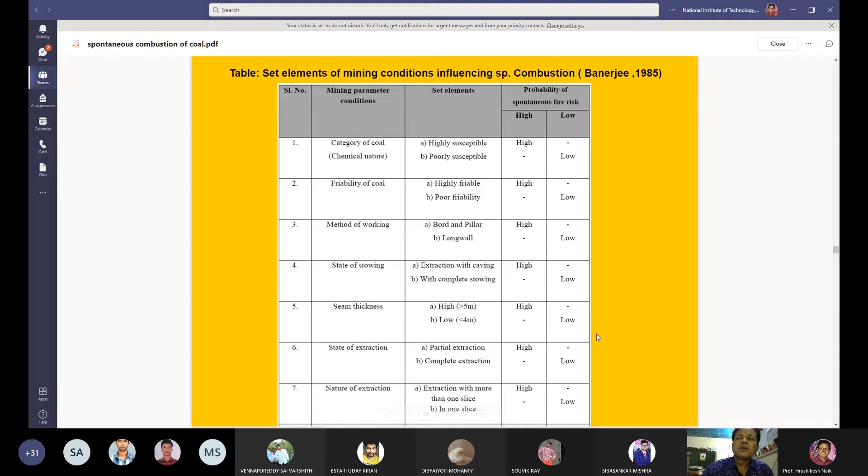State of extraction: if you are going for partial extraction, there is high risk. If you are going for complete extraction, there is low risk.

The nature of extraction: extraction with more than one slice has high risk. If you are working one slice only, there is low risk. Then geological disturbances.

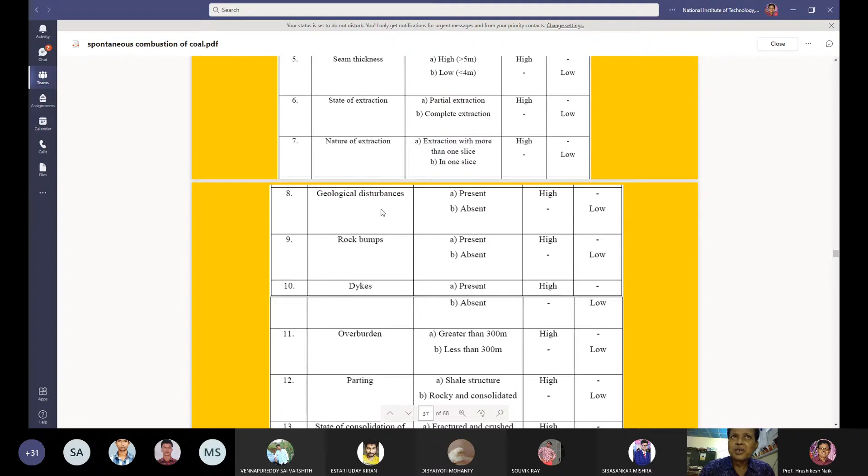If geological disturbances are present, there is high risk of fire. If geological disturbances are absent, there is low risk of fire.

Then rock bumps: if present, there is high risk of fire. If absent, there is low risk of fire.

Then geological dikes: if dikes are present, there is high risk of fire. If dikes are absent, there is low risk of fire. Then overburden.

If the overburden is greater than 300 meters, there is high risk. If the overburden is less than 300 meters, there is low risk of fire.

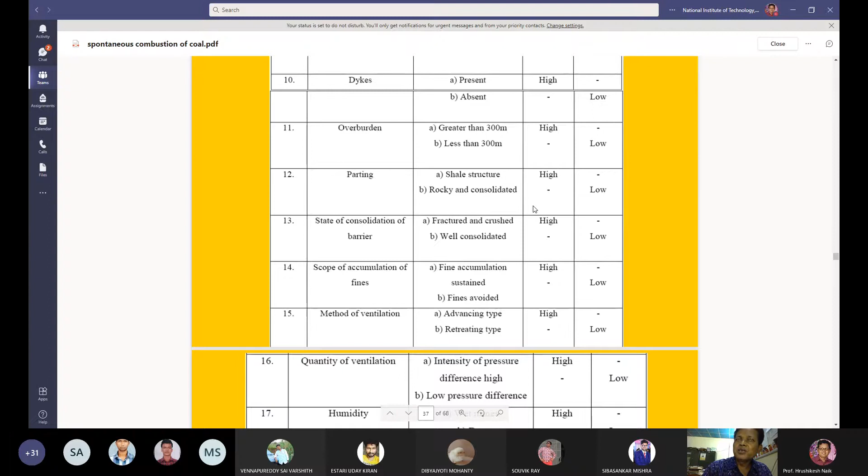Then parting: if the parting is a shale structure, there is high risk of fire. If the parting is rocky and consolidated material, there is low risk of fire.

Then state of consolidation of barrier pillar: if the barrier pillar is fractured and crushed, there is high risk of fire. If the barrier pillar is well consolidated, there is low risk of fire.

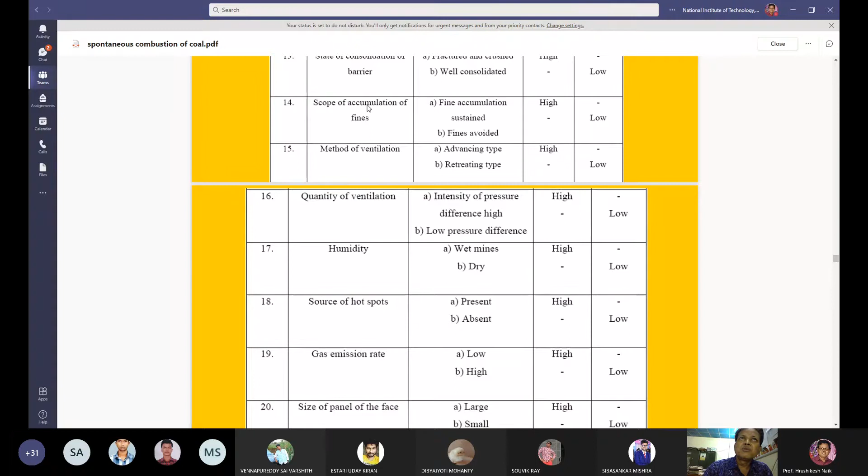Then scope of accumulation of fines: if there is fine accumulation, there is high risk of fire. If fines are avoided, there is low risk of fire.

Then method of ventilation: advancing type of ventilation has high risk of fire. Retreating type of ventilation has low risk of fire.

Then quantity of ventilation: if the intensity of pressure difference is high, there is high risk of fire. If the intensity of pressure difference is low, there is low risk of fire.

Then humidity of the mine: in wet mines, there is high risk of fire. In dry mines, there is low risk of fire. Humidity plays an important role for fire to take place in underground coal mines.

And source of hot spots: if hot spots are present, there is high risk of fire. If hot spots are absent, there is low risk of fire.

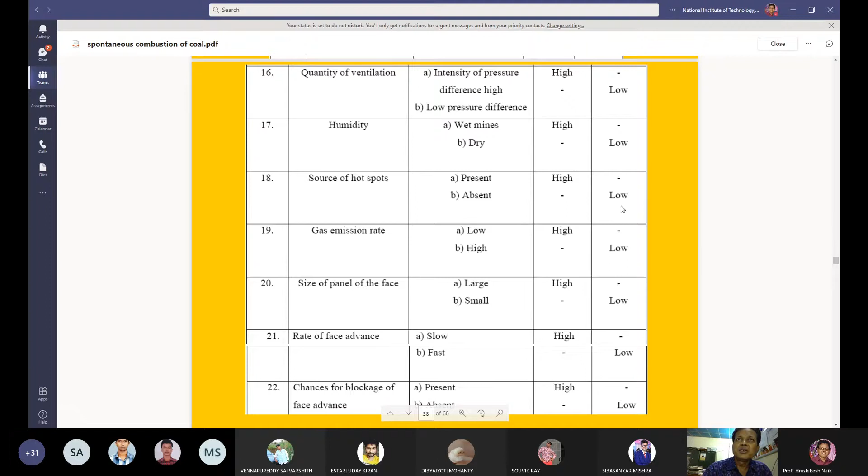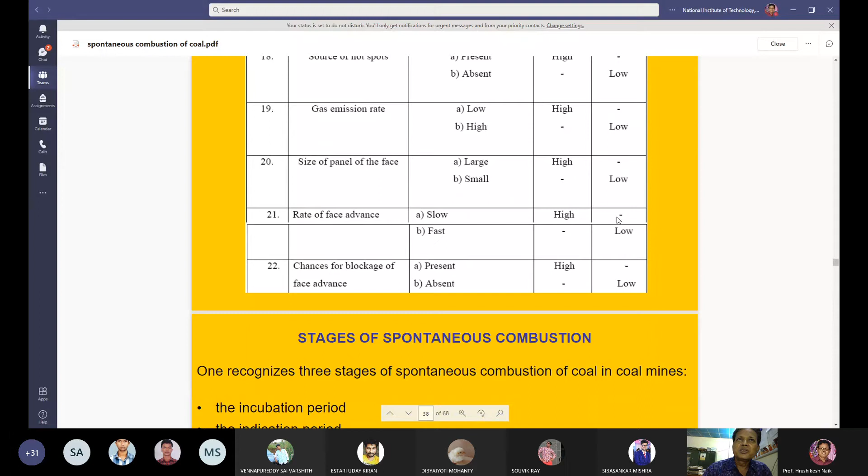If gas emission rate is low, there is high risk of fire. If gas emission rate is high, low risk of fire. Then size of panel of the face: if you are working with large size panel of face, there is high risk of fire. If you are working with small panel size, there is low risk of fire.

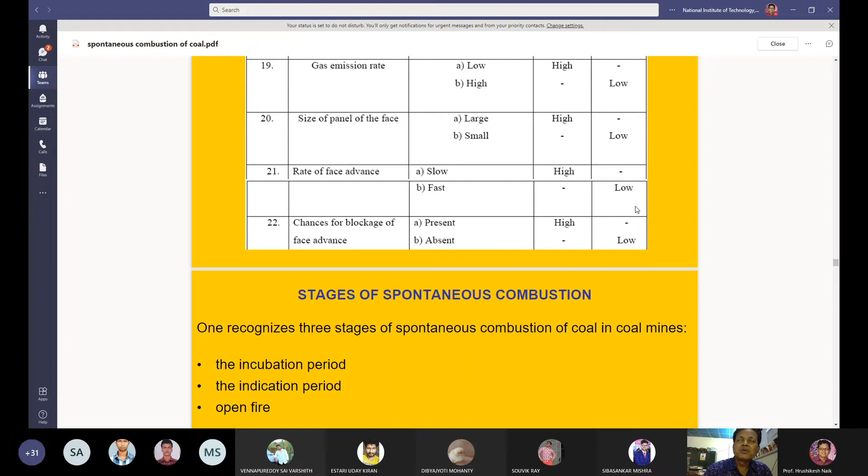Then rate of face advance. If the rate of face advance is slow, high risk of fire is there. If the rate of face advance is fast, low risk of fire is there. Then chances for blockage of face advance: if present, high risk of fire; if absent, low risk of fire.

So these are some of the parameters which affect the spontaneous heating of coal. So let us discuss now what are the stages of spontaneous combustion, the different stages of spontaneous combustion of coal.

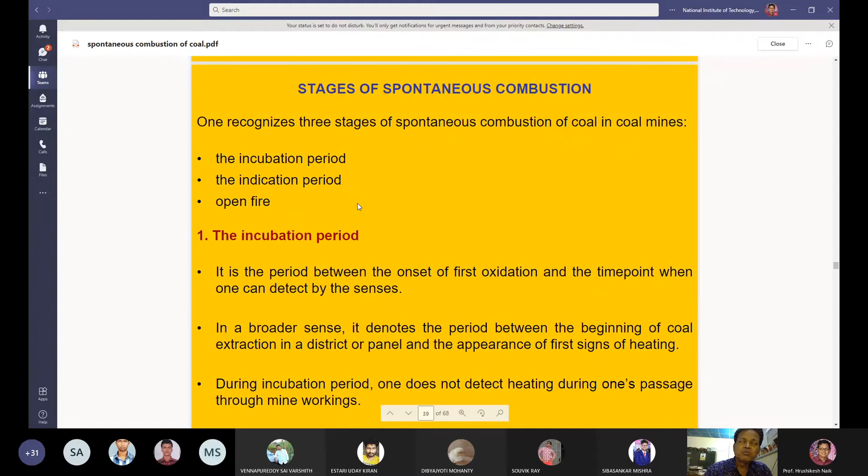One recognizes three stages of spontaneous combustion of coal in coal mines: incubation period, indication period, and open fire. Then only you will get the open fire, the third stage.

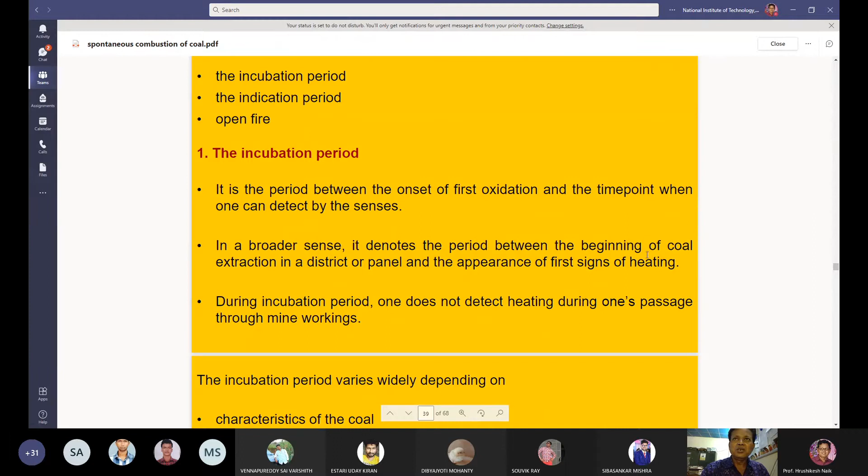So the first stage is the incubation period. What is incubation period? It is the period between the onset of first oxidation and the time point when one can detect it by the senses.

In a broader sense, it denotes the period between the beginning of coal extraction in a district or panel and the appearance of first signs of heating. So the incubation period is a very important period. During this period, one does not detect heating during one's passage through mine workings.

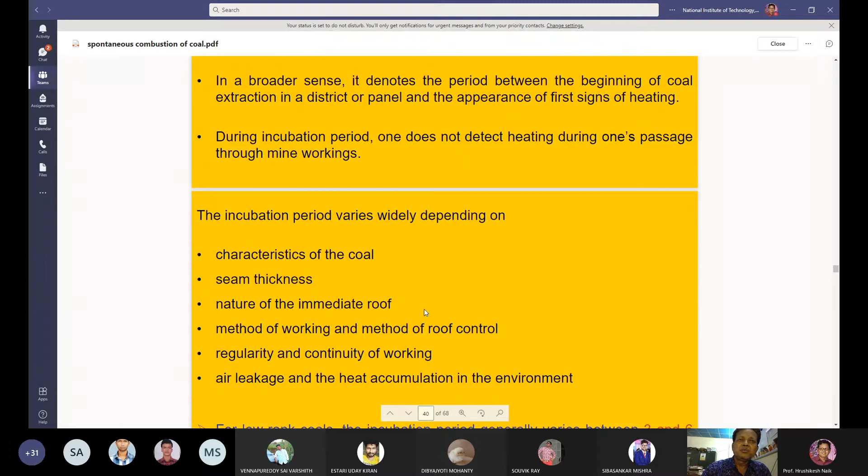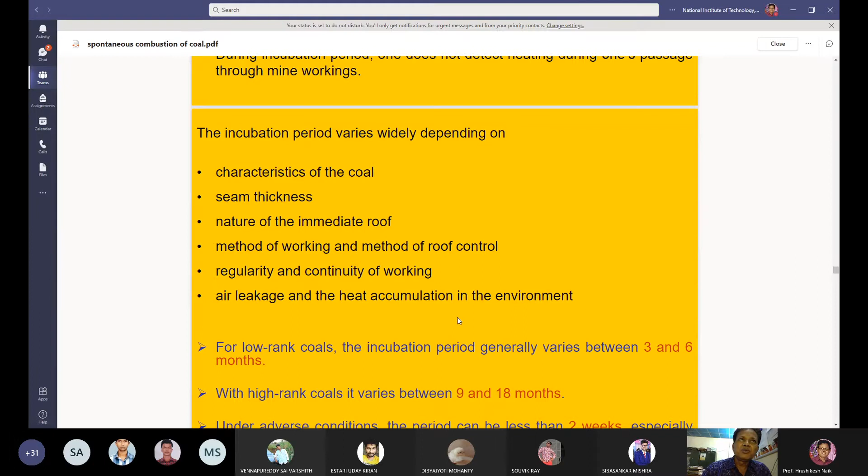The incubation period varies widely depending on characteristics of the coal, seam thickness, nature of the immediate roof, method of working and roof control, regularity and continuity of working, air leakage, and heat accumulation in the environment. These are the factors which determine the incubation period of coal.

For low rank, poor grade coals, the incubation period generally varies between 3 and 6 months. With high rank coals, it varies between 9 to 18 months. Under adverse conditions, the period can be less than 2 weeks, especially with low rank coals. If the incubation period is less than 2 weeks, it is very dangerous because the coal will catch fire very quickly.

Then what is indication period? The end of the incubation period is the beginning of the indication period. It is marked by sweating and haze, caused by warmed up air from a fire area cooling and coming in contact with cooler coal, rock, and metallic surfaces, depositing moisture.

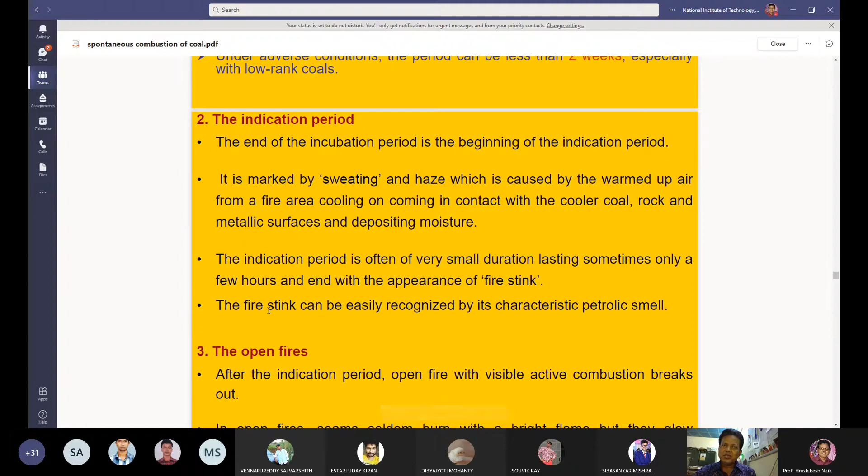The indication period is often of very small duration, lasting sometimes only a few hours, and ends with the appearance of the fire stink. The fire stink can be easily recognized by its characteristic petrolic smell. If there is a fire stink, the smell of petrol will come out, from which you can know there is fire.

So the third stage is the open fire. After the two stages are passed, the third stage will come: open fire will be there. After the indication period, open fire with visible active combustion breaks out. In open fires, seams seldom burn with a bright flame, but glow, developing bluish white clouds of smoke.

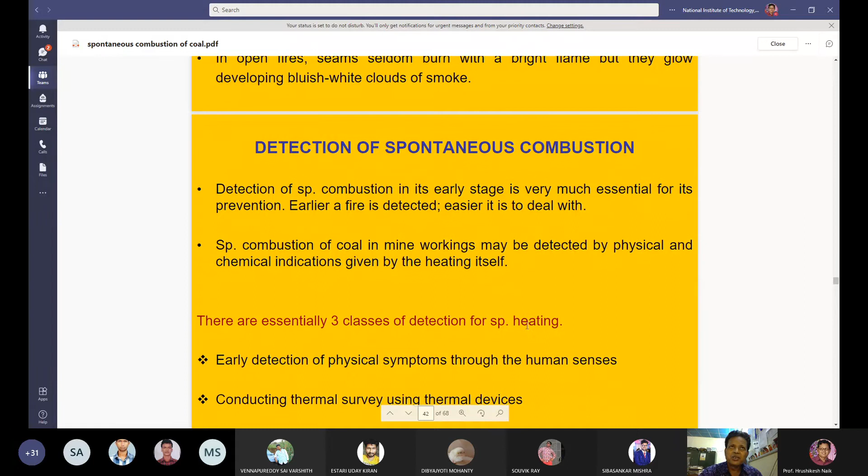Then how to detect spontaneous combustion? Whether there is spontaneous heating or not, how to detect it? The detection of spontaneous combustion in its early stage is very much essential for its prevention. Earlier a fire is detected, easier it would be to deal with.

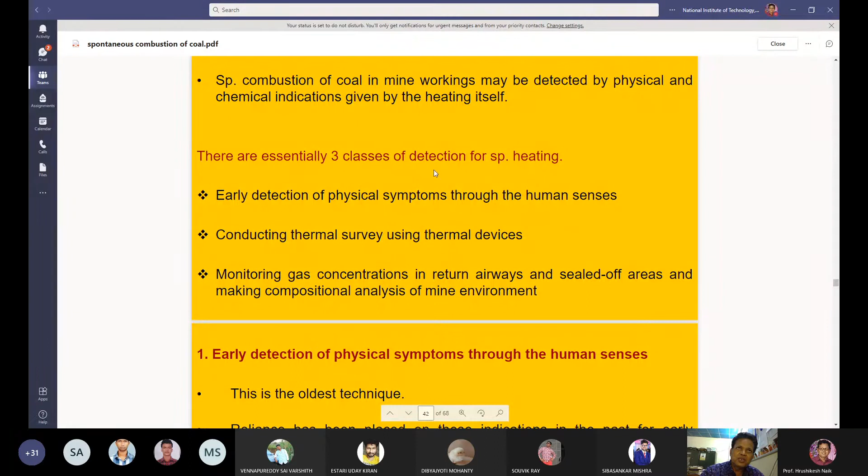Spontaneous combustion of coal in mine workings may be detected by physical means or by chemical indications given by the heating itself. So there are three classes of detection of spontaneous heating of coal. First one is early detection of physical symptoms through the human senses.

Conducting thermal survey using thermal devices. Monitoring gas concentrations in return airways and sealed off areas, and making compositional analysis of mine environment.

There are three classes of detection of spontaneous heating of coal. One is early detection of physical symptoms through the human senses. Second, conducting thermal survey using thermal devices. Third, monitoring gas concentrations in return airways and sealed off areas, and making compositional analysis of mine environment.

The first one is early detection of physical symptoms through the human senses. This is the oldest technique. Reliance has been placed on these indications in the past for early detection of spontaneous heating. Development of heating in a goaf is generally accompanied by the appearance of haze, sweating of the strata, gob stink or fire stink, sound, smoke, and fire.

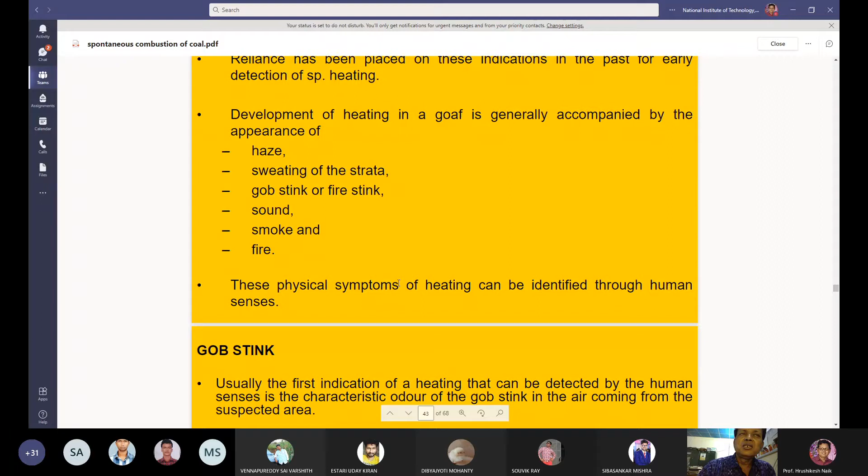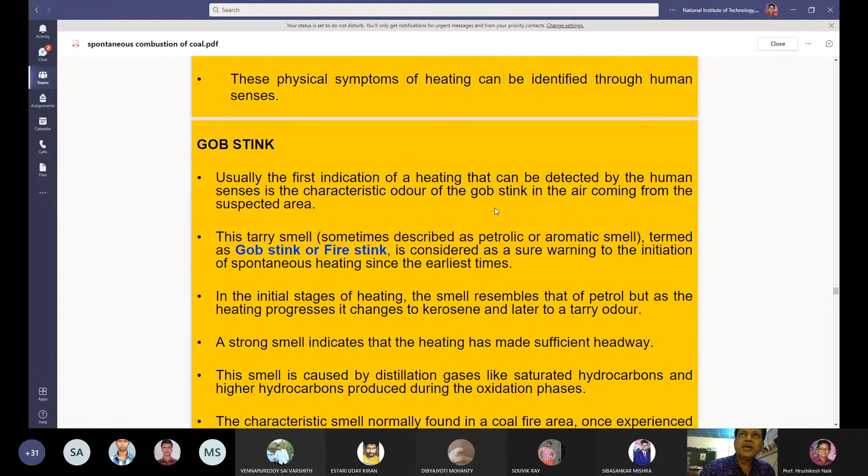What is gob stink? Usually, the first indication of a heating that can be detected by the human senses is the characteristic odor of the gob stink in the air coming from the suspected area. This tarry smell, this gob stink, is tar-like smell, sometimes described as petrolic smell or aromatic smell, termed as gob stink or fire stink. So gob stink or fire stink smells like petrol.

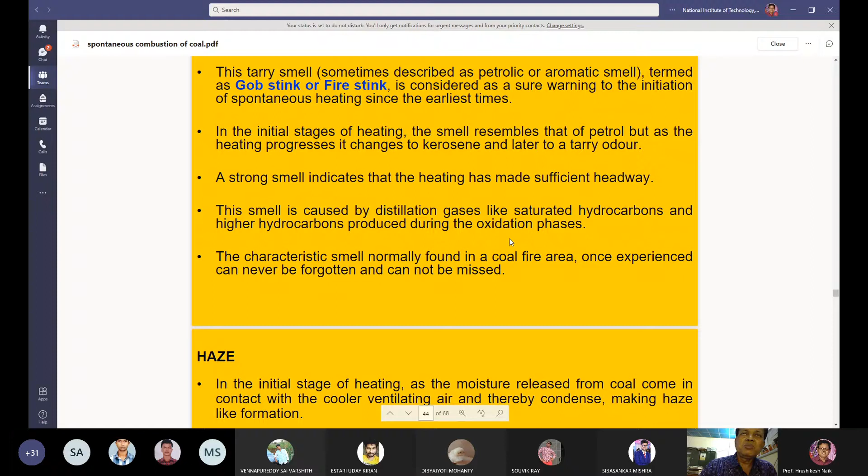It is considered as a sure warning to the initiation of spontaneous heating of coal since the earliest times. In the initial stages of heating, the smell resembles that of petrol, but as the heating progresses, it changes to kerosene and later to a tarry odor. A strong smell indicates that the heating has made sufficient headway. The smell is caused by distillation gases like saturated hydrocarbons and higher hydrocarbons produced during the oxidation phases. The characteristic smell normally found in a coal fire area, once experienced, can never be forgotten and cannot be missed.

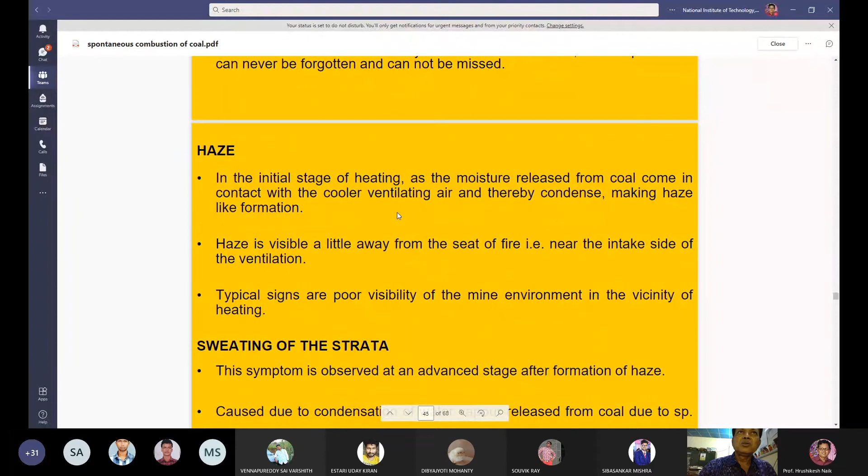The second type of indication is hazy atmosphere. In the initial stage of heating, as the moisture released from coal comes in contact with cooler ventilating air, it condenses, making haze-like formation.

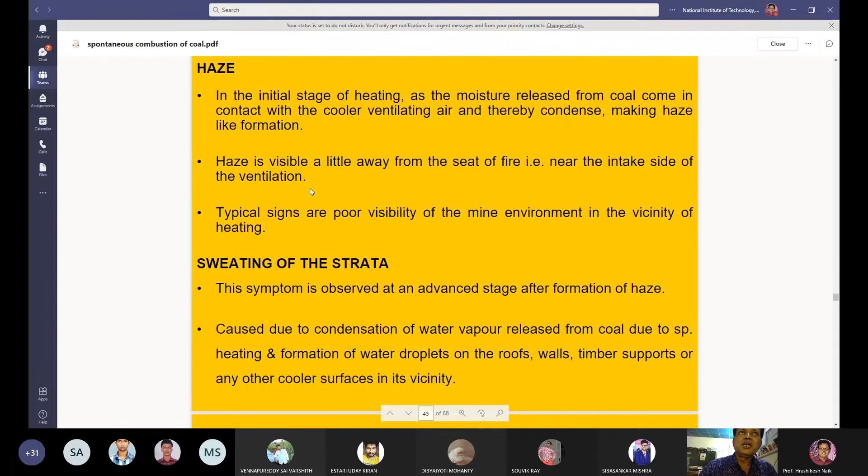What is haze? In the initial stage of heating, as the moisture released from coal comes in contact with the cooler ventilating air, it condenses, making haze-like formation. Haze is visible a little away from the seat of fire, that is near the intake side of the ventilation. Typical signs of haze are poor visibility of the mine environment in the vicinity of heating.

What is sweating of the strata? This is the third indication of fire. This symptom is observed at an advanced stage after formation of haze, caused due to condensation of water vapor released from coal due to spontaneous heating, and formation of water droplets on the roofs, on the walls, on the timber supports, or any other cooler surfaces in its vicinity.

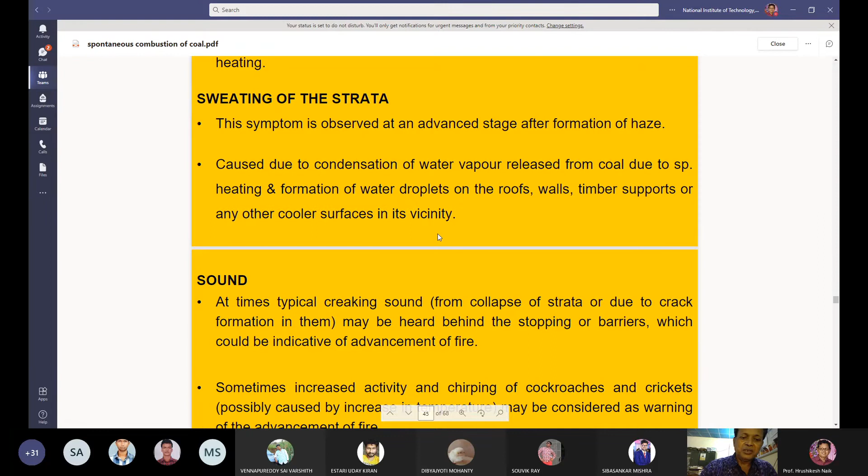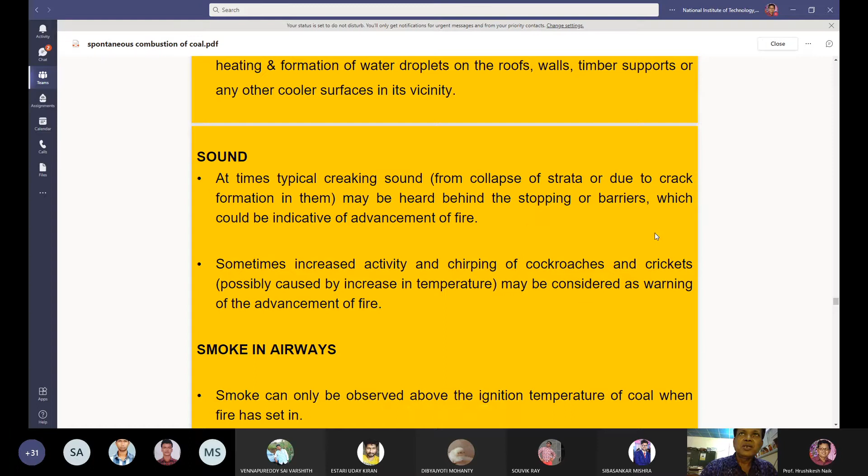The fourth indication of fire is sound. At times, typical creaking sound from collapse of strata or due to crack formation in them may be heard behind the stopping or barriers, which could be indicative of advancement of fire. Sometimes increased activity and chirping of cockroaches and crickets, possibly caused by increase in temperature, may be considered as warning of the advancement of the fire.

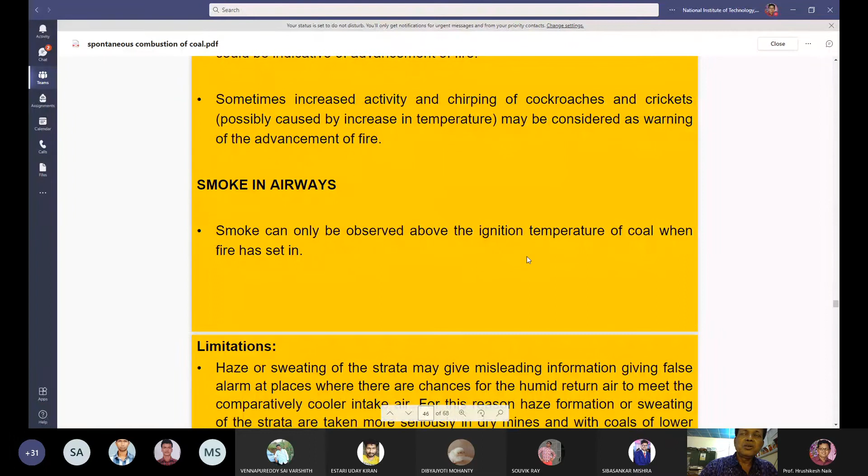Then smoke in airways. Wherever there is fire, there will be smoke. Smoke can only be observed above the ignition temperature of coal when fire has set in. These are the human senses - you can come to know if there is a fire from the human sense.

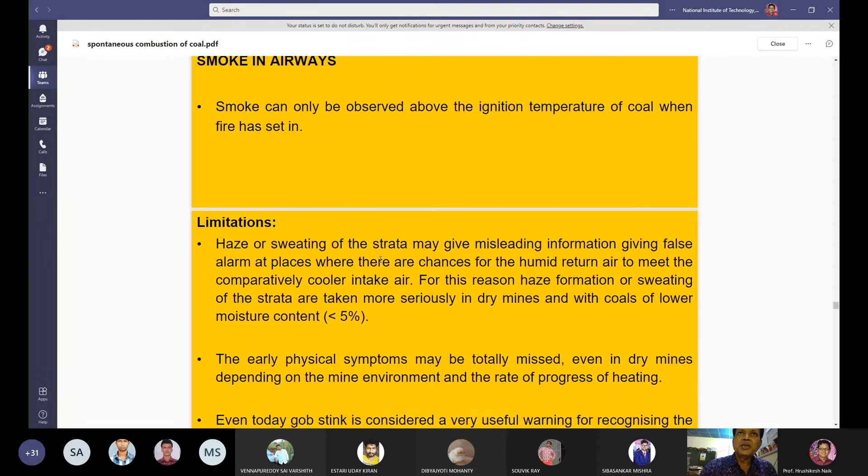But there are some limitations of detection of fire by human sense. Haze or sweating of the strata may give misleading information, giving false alarm at places where there are chances for the humid return air to meet the comparatively cooler intake air. Sometimes the haze or sweating will give misinformation. For this reason, haze formation or sweating of strata are taken more seriously in dry mines and with coals of lower moisture content, less than 5%.

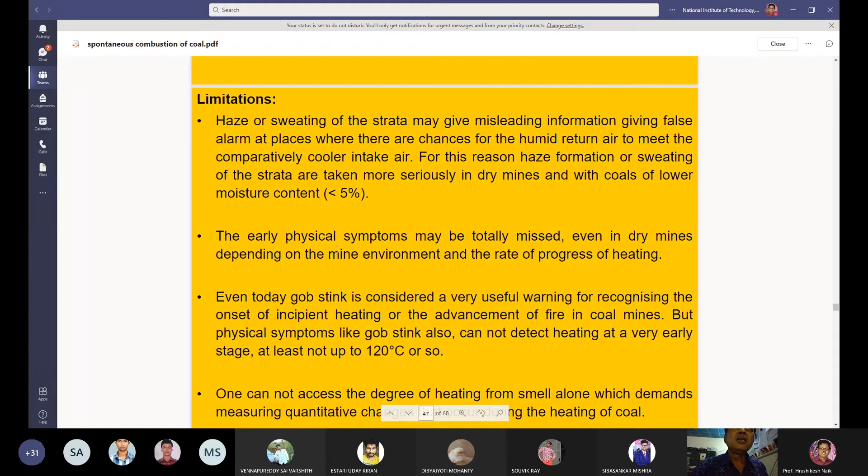The early physical symptoms may be totally missed, even in dry mines, depending on the mine environment and the rate of progress of heating. Even today, gob stink is considered a very useful warning for recognizing the onset of incipient heating or the advancement of fire in coal mines.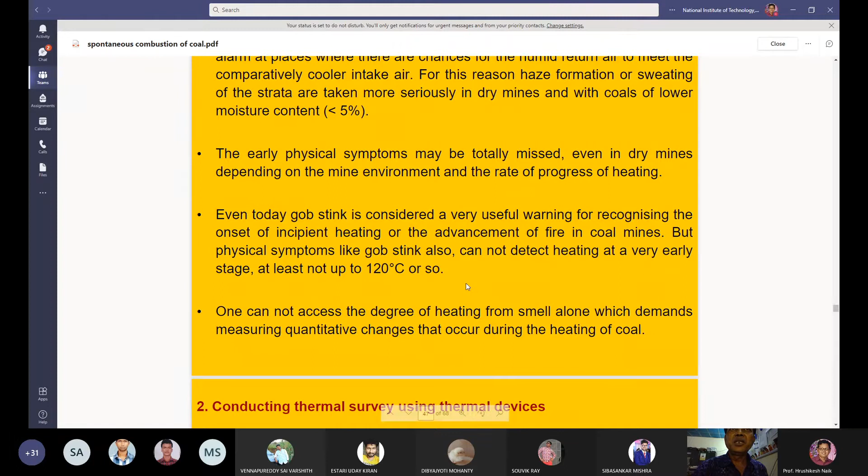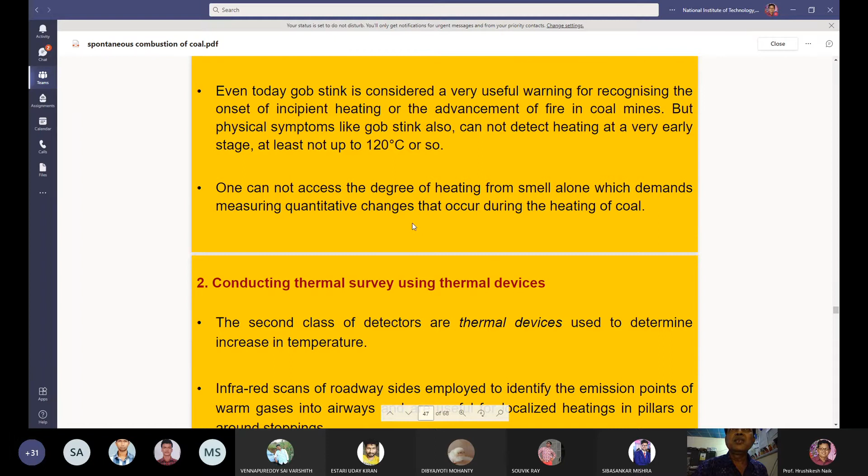But physical symptoms like gob stink also cannot detect heating at a very early stage, at least not up to 120 degrees centigrade or so. One cannot assess the degree of heating from smell alone, which demands measuring quantitative changes that occur during the heating of the coal. Therefore, we have to conduct a thermal survey to make sure that there is spontaneous heating of coal.

So the second type of detection is conducting thermal survey using thermal devices to measure the temperature of the strata. These thermal devices are used to determine increase in temperature. Infrared scans of roadway sides are employed to identify the emission points of warm gases into airways and are useful for localized heatings in pillars or around stoppings.

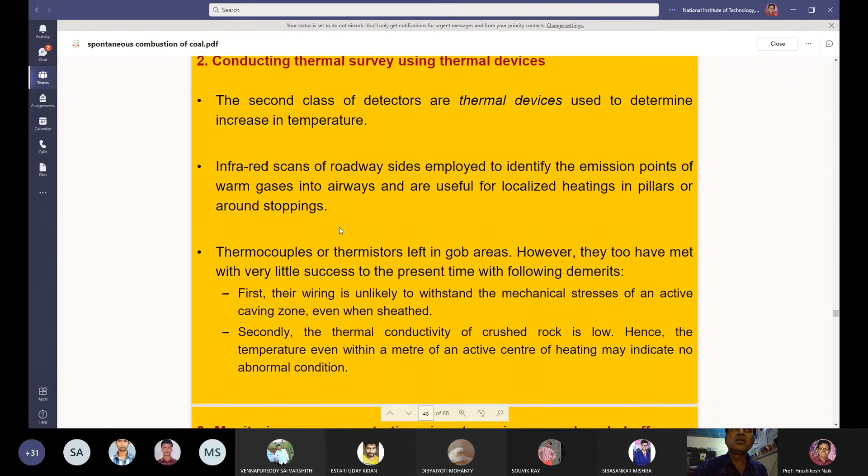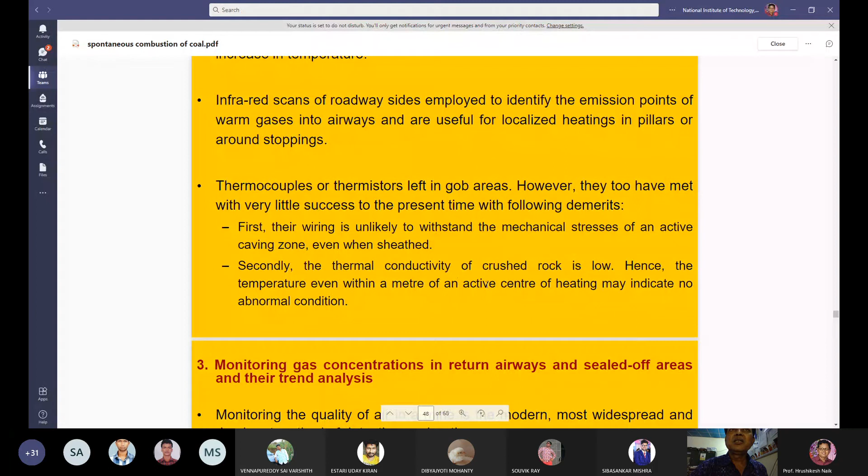Thermocouples or thermistors are left in GOB areas, however, they too have met with very little success to the present time, with the following demerits. First, their wiring is unlikely to withstand the mechanical stresses of an active caving zone even when sheathed. Secondly, the thermal conductivity of crushed rock is low. Hence, the temperature even within a meter of an active center of heating may indicate no abnormal condition.

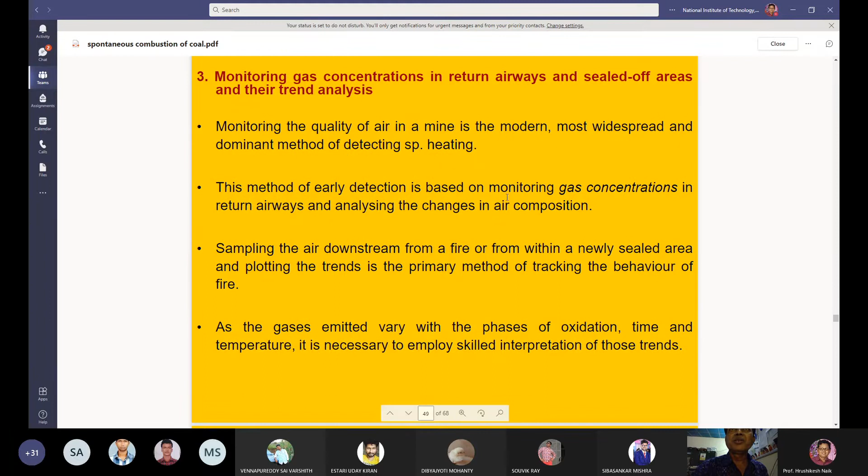Therefore, there is a third way of detecting fire: monitoring gas concentrations in return airways and sealed off areas, and their trend analysis. Monitoring the quality of air in a mine is the modern, most widespread, and dominant method of detecting spontaneous heating of coal. This method of early detection is based on monitoring gas concentrations in return airways and analyzing the changes in air composition. Sampling the air downstream from a fire or from within a newly sealed off area and plotting the trends is the primary method of tracking the behavior of the fire. As the gases emitted vary with the phases of oxidation, time and temperature, it is necessary to employ skilled interpretation of those trends. So for this monitoring of gas concentration, certain types of indices are used.

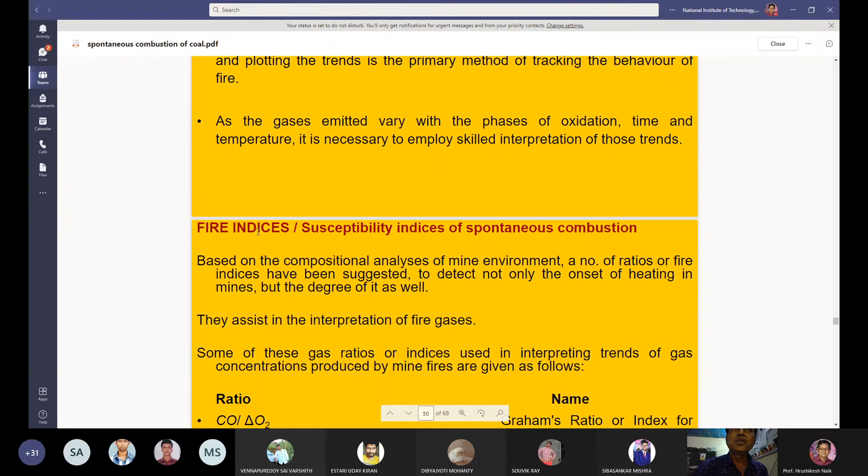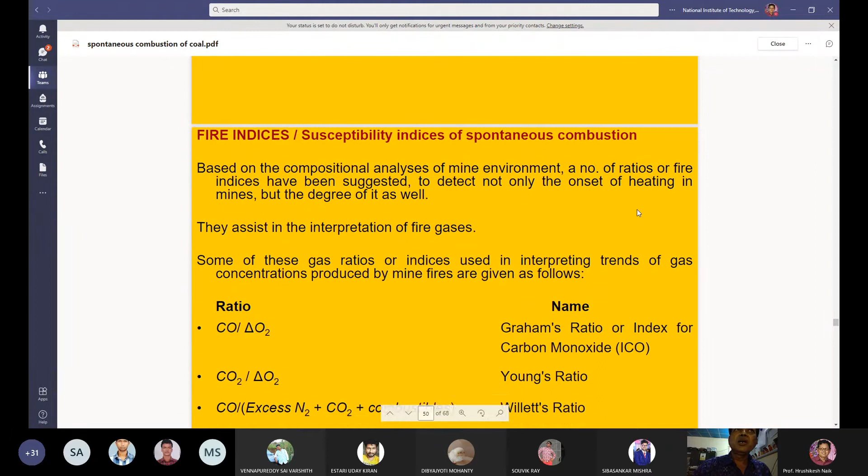Fire indices, or susceptibility indices of spontaneous combustion of coal. Based on the compositional analysis of mine environment, a number of ratios or fire indices have been suggested to detect not only the onset of heating in mines, but the degree of it as well, assisting in the interpretation of fire gases. Some of these gas ratios or indices used in interpreting trends of gas concentrations produced by mine fires are given below.

Carbon monoxide divided by oxygen absorbed is called the Graham's ratio, or index for carbon monoxide. Similarly, carbon dioxide produced divided by oxygen absorbed is called Young's ratio. So Graham's ratio is for carbon monoxide, and Young's ratio is for carbon dioxide.

Then there is another ratio called Willett's ratio: carbon monoxide divided by excess nitrogen plus carbon dioxide plus combustibles combined together. This ratio is called Willett's ratio.

Then another type of ratio is called the Jones and Trickett ratio. What is Jones and Trickett's ratio? It is carbon dioxide plus 0.75 carbon monoxide minus 0.25 hydrogen, divided by oxygen absorbed. That ratio is called Jones and Trickett ratio.

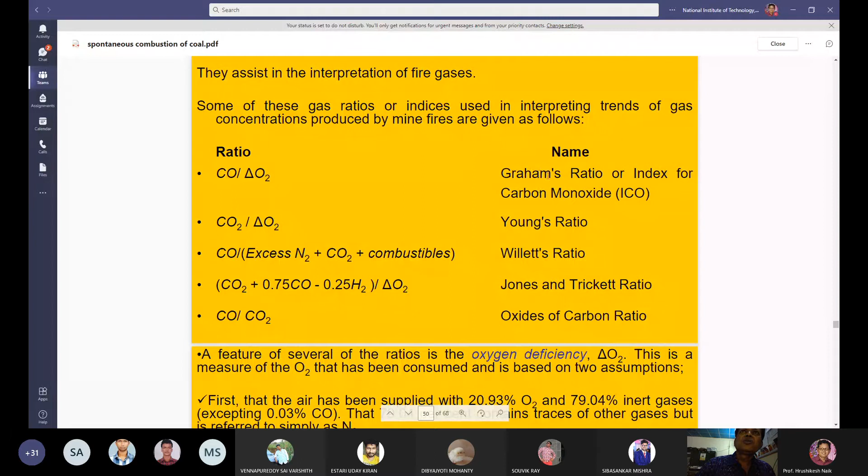Then another ratio is carbon monoxide divided by carbon dioxide. This is called the oxides of carbon ratio. So these are the different types of ratios used for monitoring coal mine fire: Graham's ratio, Young's ratio, Willett's ratio, Jones and Trickett ratio, and oxides of carbon ratio.

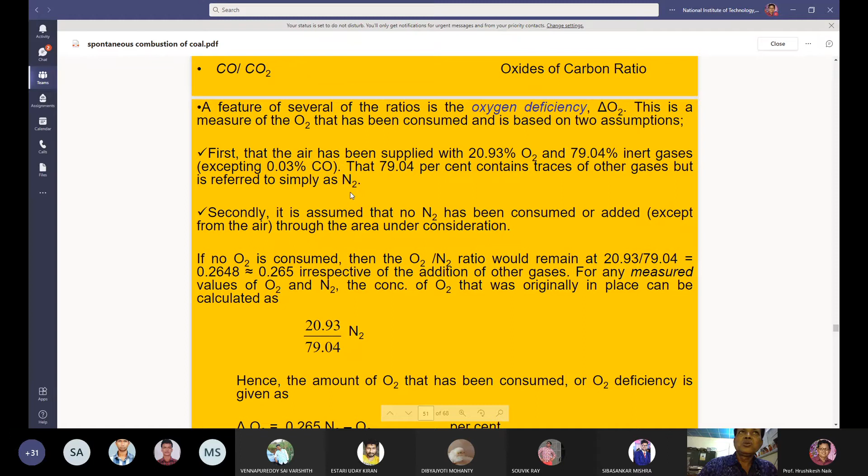A feature of several of these ratios is the oxygen deficiency, delta O2. This is a measure of oxygen that has been consumed, and is based on two assumptions. First, that the air has been supplied with 20.93% oxygen, 79.04% inert gases, and 0.03% carbon monoxide, where that 79.04% contains traces of other gases but is referred to simply as nitrogen.

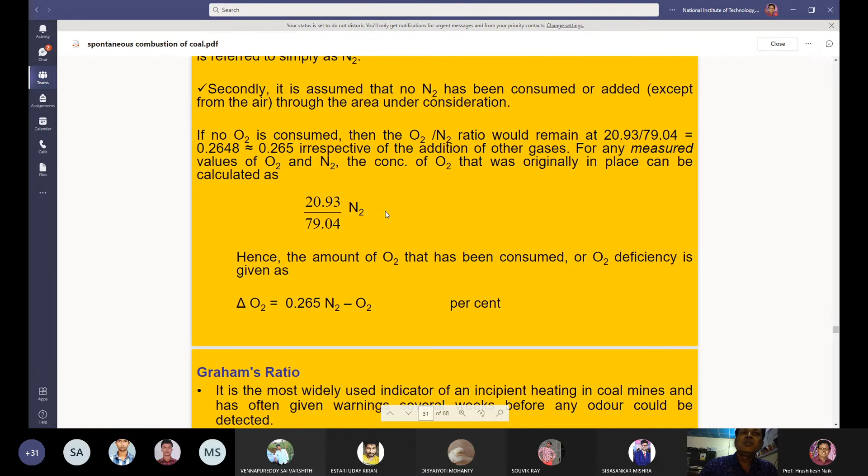Secondly, it is assumed that no nitrogen has been consumed or added except from the air under consideration. If no oxygen is consumed, then the oxygen by nitrogen ratio would remain at 20.93 divided by 79.04, which is equal to 0.2648 or 0.265, irrespective of the addition of other gases. For any measured values of oxygen and nitrogen, the concentration of oxygen that was originally in place can be calculated as 20.93 divided by 79.04 into nitrogen, which gives the concentration of oxygen.

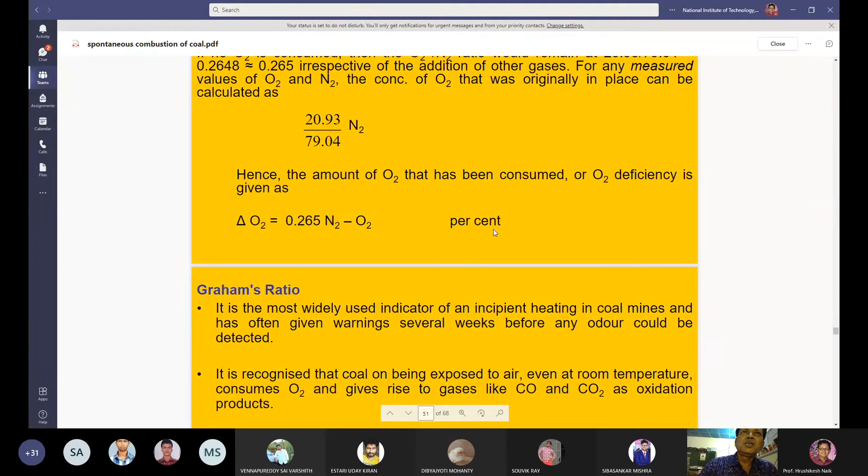Hence, the amount of oxygen that has been consumed, or oxygen deficiency, is given as delta O2 equals 0.265 N2 minus oxygen percent. On the basis of that, you calculate the Graham's ratio.

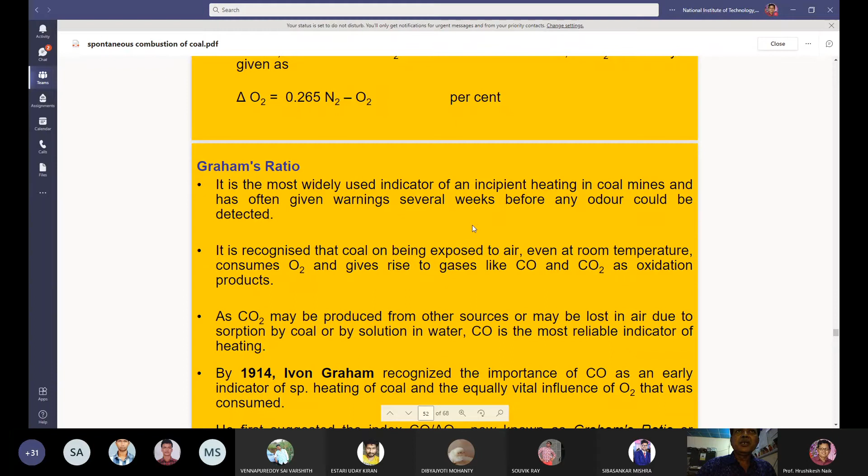It is the most widely used indicator of an incipient heating in coal mines and has often given warnings several weeks before any odor could be detected. It is recognized that coal, on being exposed to air even at room temperature, consumes oxygen and gives rise to gases like carbon monoxide and carbon dioxide as oxidation products. As carbon dioxide may be produced from other sources or may be lost in air due to sorption by coal or by solution in water, carbon monoxide is the most reliable indicator of heating.

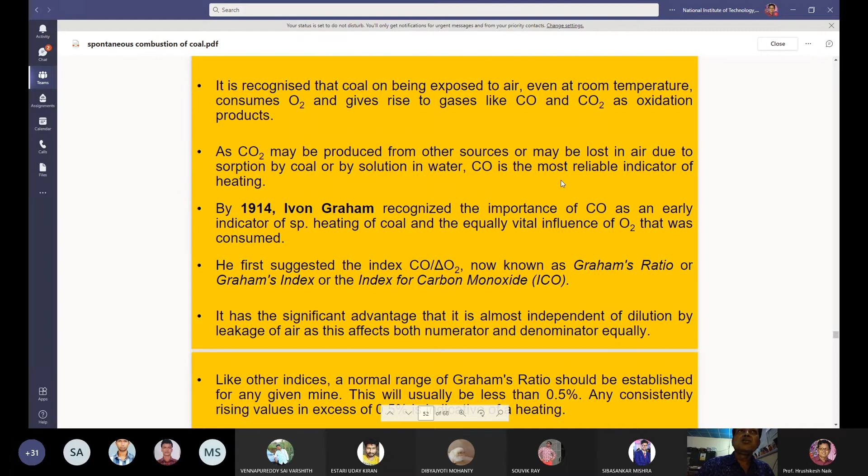By 1914, Ivon Graham recognized the importance of carbon monoxide as an early indicator of spontaneous heating of coal and the equally vital influence of oxygen that was consumed. He first suggested the index carbon monoxide divided by oxygen deficiency, now known as Graham's ratio, Graham's index, or the index for carbon monoxide.

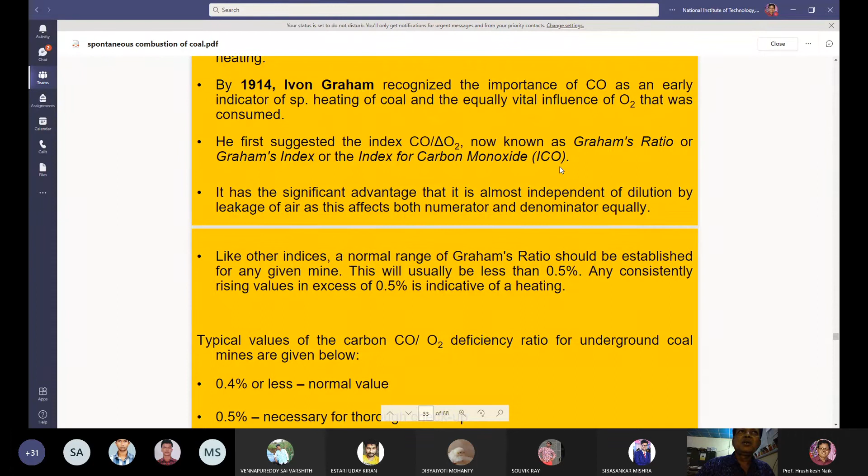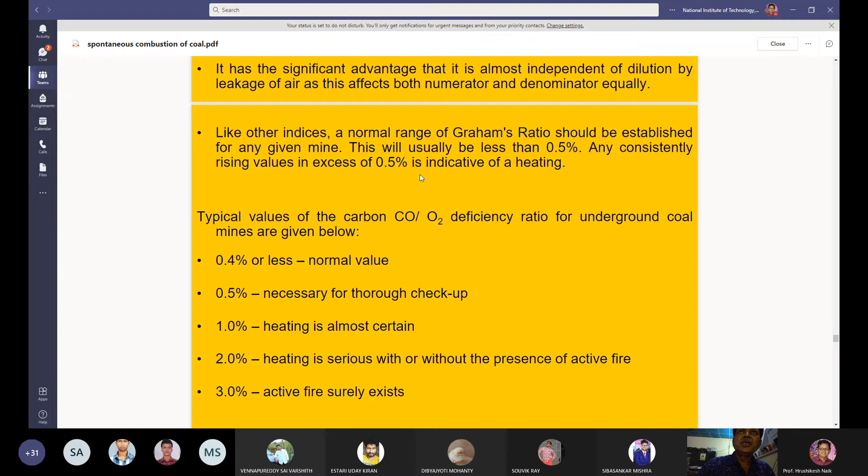It has the significant advantage that it is almost independent of dilution by leakage of air, as this affects both numerator and denominator equally. Like other indices, a normal range of Graham's ratio should be established for any given mine. This will usually be less than 0.5%. Any consistently rising values in excess of 0.5% is indicative of spontaneous heating of coal.

The typical values of carbon monoxide divided by oxygen deficiency ratio for underground coal mines are given below. If the ratio is 0.4% or less, it is a normal value. If the ratio is 0.5%, it's necessary for thorough checkup. If the value is 1%, heating is almost certain. If the value is 2%, heating is serious with or without the presence of active fire. If the value is 3%, active fire surely exists.

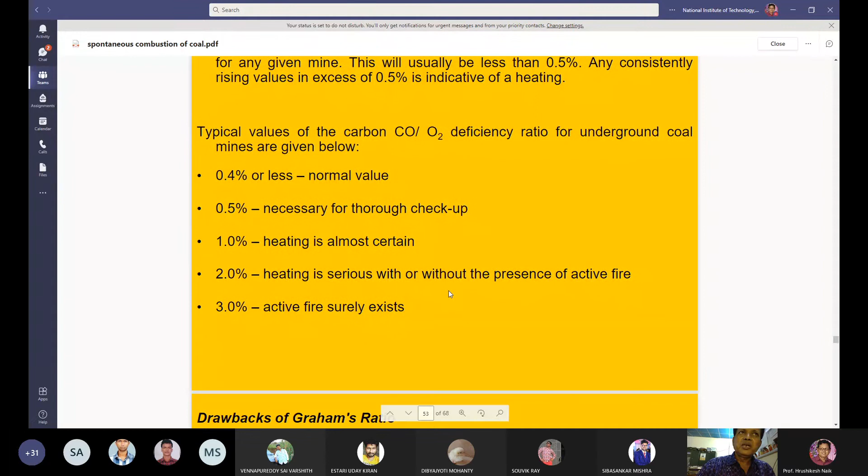From this Graham's ratio, you can know whether there is a fire or not. But there are some drawbacks of Graham's ratio. Its accuracy becomes suspect if very little oxygen has been consumed. That is, Graham's ratio is unreliable if the oxygen deficiency is less than 0.3%. This is a weakness shared by the other indices that involve oxygen deficiency.

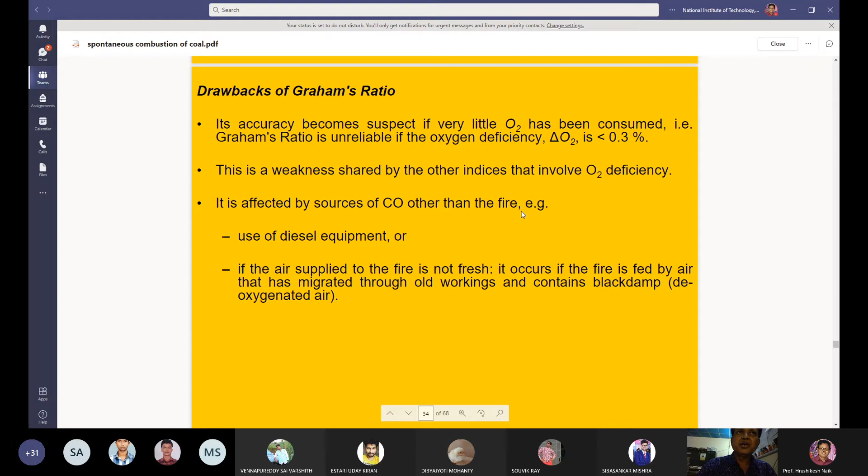It is affected by sources of carbon monoxide other than the fire. The use of diesel equipment also sometimes produces carbon monoxide. If the air supplied to the fire is not fresh, it occurs if the fire is fed by air that has migrated through old workings and contains black damp, de-oxygenated air.

Then there is another ratio which is called Young's ratio. Young's ratio takes care of carbon dioxide, which is the most prolific of the gases produced in mine fires.

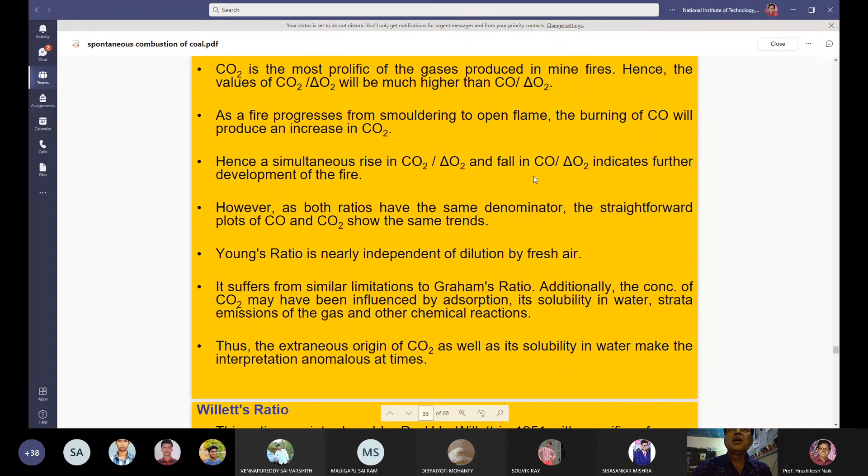Hence, the values of carbon dioxide divided by oxygen deficiency will be much higher than carbon monoxide divided by oxygen deficiency. As a fire progresses, smoldering to open flame, the burning of carbon monoxide will produce an increase in carbon dioxide. Hence, a simultaneous rise in carbon dioxide by oxygen deficiency and fall in carbon monoxide by oxygen deficiency indicates further development of the fire.

However, as both ratios have the same denominator, the straightforward plots of carbon monoxide and carbon dioxide show the same trends. Young's ratio is nearly independent of dilution of fresh air. It suffers from similar limitations to Graham's ratio. Additionally, the concentration of carbon dioxide may have been influenced by adsorption, its solubility in water, strata emissions of the gas, and other chemical reactions. Thus, the extraneous origin of carbon dioxide as well as its solubility in water make the interpretation anomalous at times.

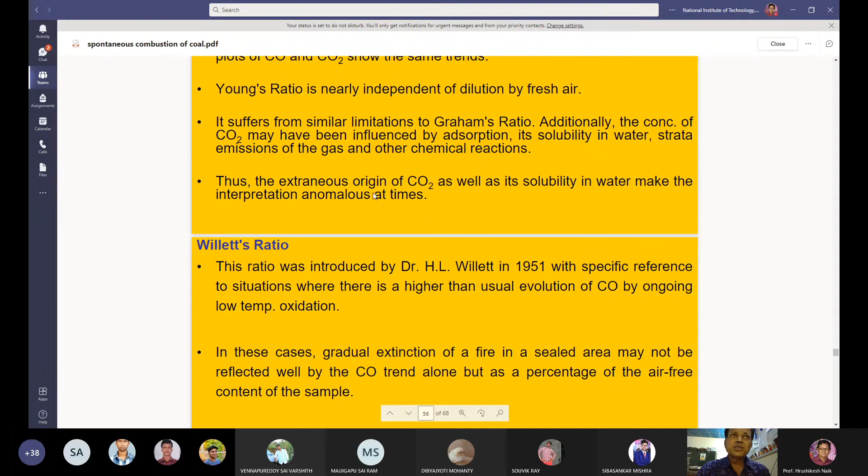Then there is a third type of ratio which is called Willett's ratio. This ratio was introduced by Dr. H.L. Willett in the year 1951 with specific reference to situations where there is a higher than usual evolution of carbon monoxide by ongoing low temperature oxidation.

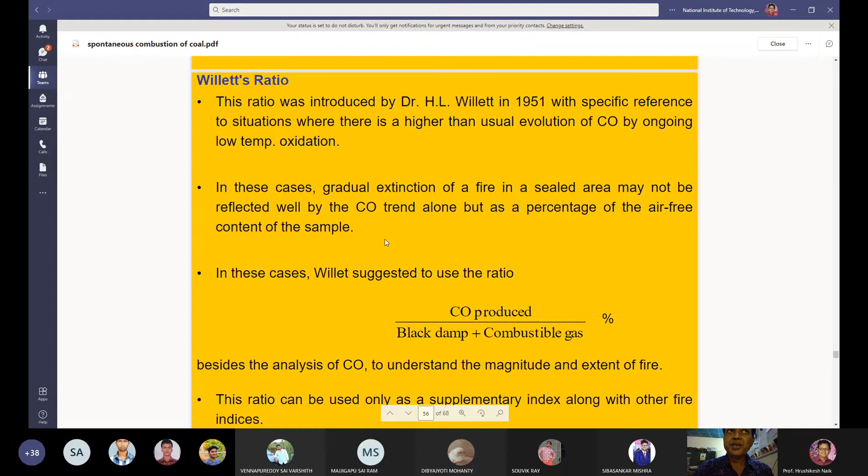In these cases, gradual extinction of a fire in a sealed area may not be reflected well by the carbon monoxide trend alone, but as a percentage of the air-free content of the sample. In these cases, Willett suggested to use the ratio carbon monoxide produced divided by black damp plus combustible gas. So besides the analysis of carbon monoxide to understand the magnitude and extent of fire, this ratio can be used only as a supplementary index along with other fire indices.

There is another ratio which is called the Jones and Trickett ratio, JTR. It is used as a measure of reliability of sample analysis and also as an indicator of the type of fuel involved. It can be used for the gaseous products of both fires and explosions. The Jones and Trickett ratio, giving the relationship between the products of combustion with oxygen deficiency, is defined as below.

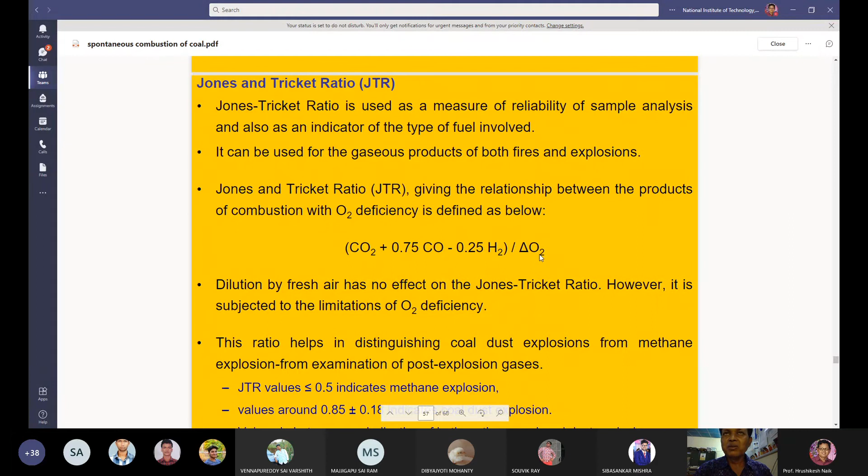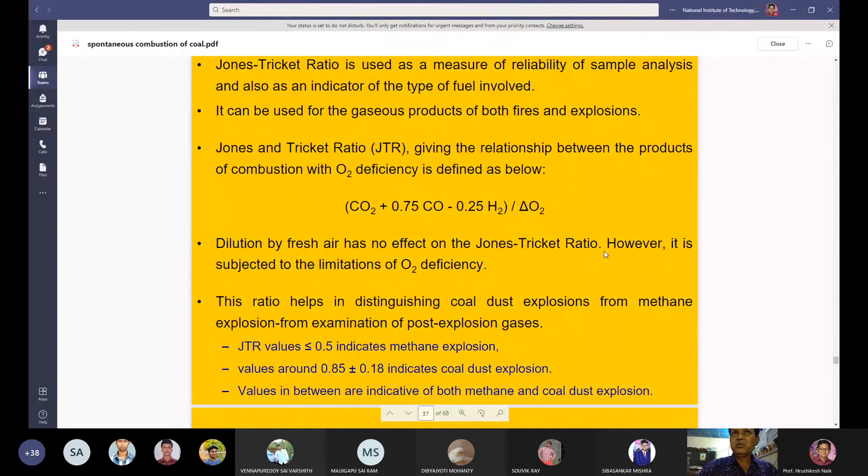This is called the Jones and Trickett ratio: carbon dioxide plus 0.75 carbon monoxide minus 0.25 hydrogen, divided by oxygen deficiency. Dilution by fresh air has no effect on the Jones-Trickett ratio. However, it is subjected to the limitations of oxygen deficiency.

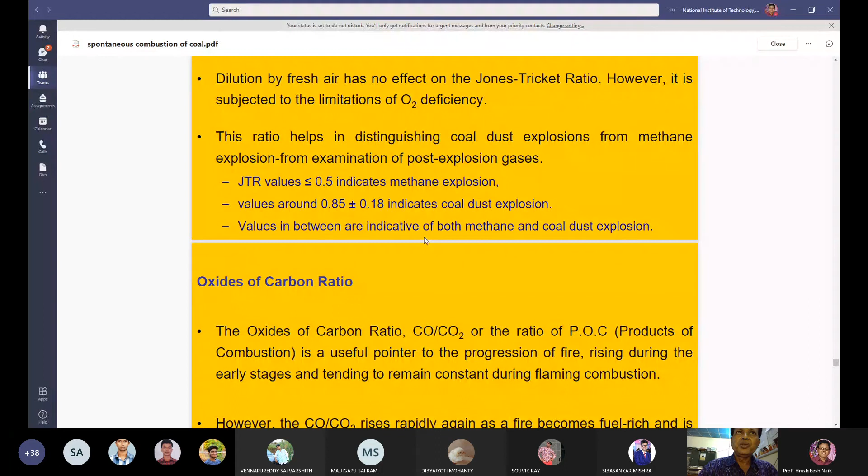This ratio helps in distinguishing coal dust explosions from methane explosions from examination of post-explosion gases. If the JTR value is less than 0.5, it indicates methane explosion. If the JTR value is around 0.85 plus or minus 0.18, it indicates coal dust explosion. If the JTR values are in between, it is indicative of both methane and coal dust explosion.

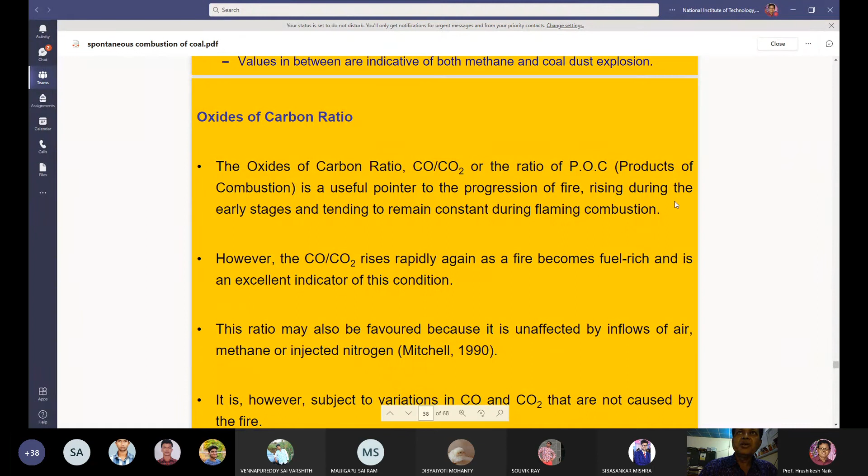Another ratio is called oxides of carbon, which means carbon monoxide divided by carbon dioxide. This ratio, also called the POC (products of combustion) ratio, is a useful pointer to the progression of fire, rising during the early stages and tending to remain constant during flaming combustion. However, carbon monoxide by carbon dioxide rises rapidly again as a fire becomes fuel rich, making it an excellent indicator of this condition.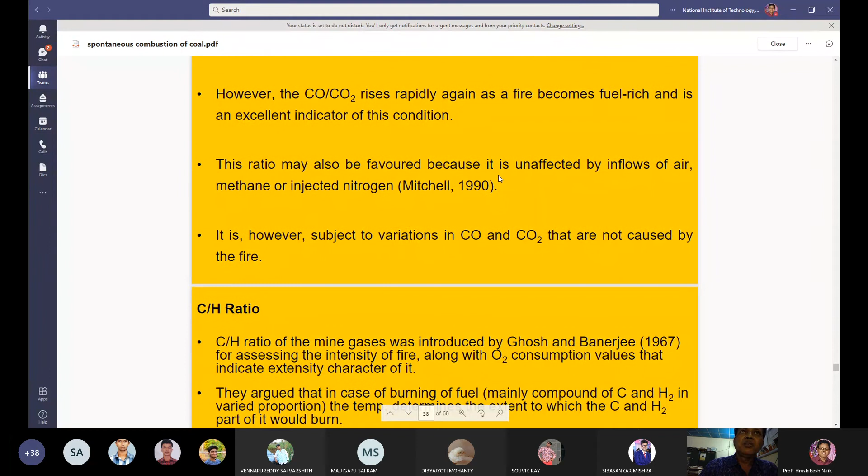This ratio may also be favored because it is unaffected by inflows of air, methane, or injected nitrogen. It is, however, subject to variations in carbon monoxide and carbon dioxide that are not caused by the fire.

Then another ratio is there which is called the C by H ratio. The C by H ratio of mine gases was introduced by Professor A.K. Ghosh and Professor S.P. Banerjee in the year 1967, for assessing the intensity of fire along with oxygen consumption values that indicate the extensity character of it.

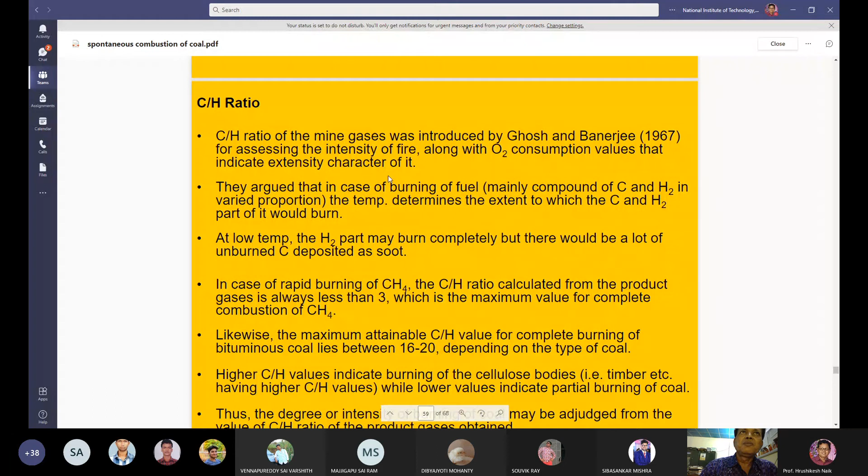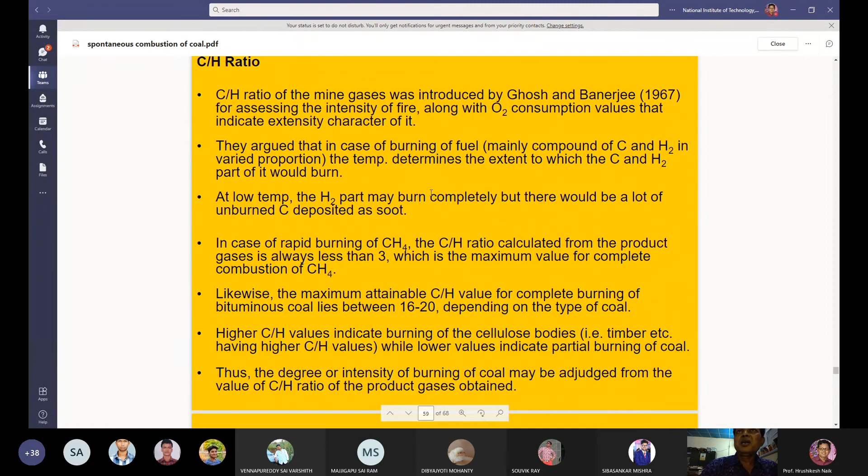They argued that in case of burning fuel, mainly a compound of carbon and hydrogen in varied proportion, the temperature determines the extent to which the carbon and hydrogen part would burn. At low temperature, the hydrogen part may burn completely, but there would be a lot of unburned carbon deposited as soot.

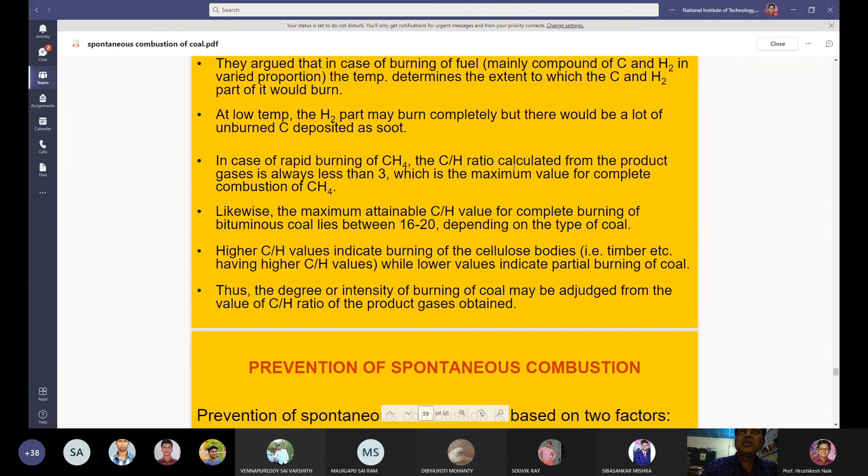In case of rapid burning of methane, the C by H ratio calculated from the product gases is always less than 3, which is the maximum value for complete combustion of methane.

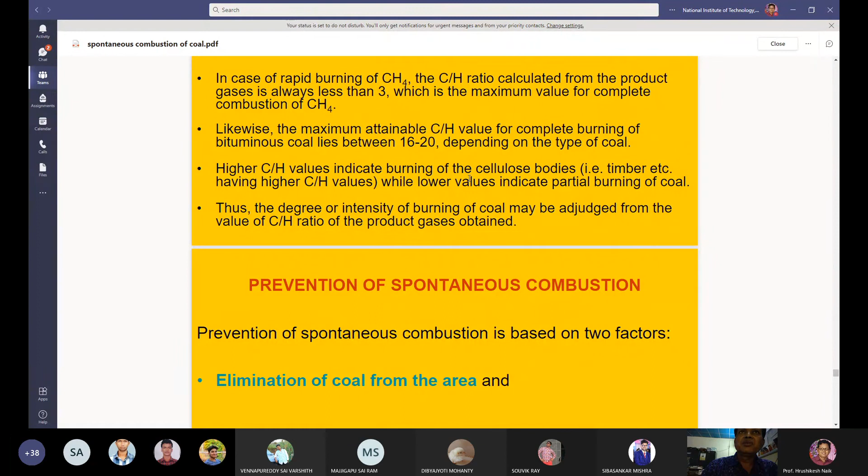Likewise, the maximum attainable C by H value for complete burning of bituminous coal lies between 16 to 20, depending on the type of coal mined. Higher C by H values indicate burning of cellulose bodies, timber, etc., having higher C by H values, while lower values indicate partial burning of coal. Thus, the degree or intensity of burning of coal is judged from the value of the C by H ratio of the product gases obtained.

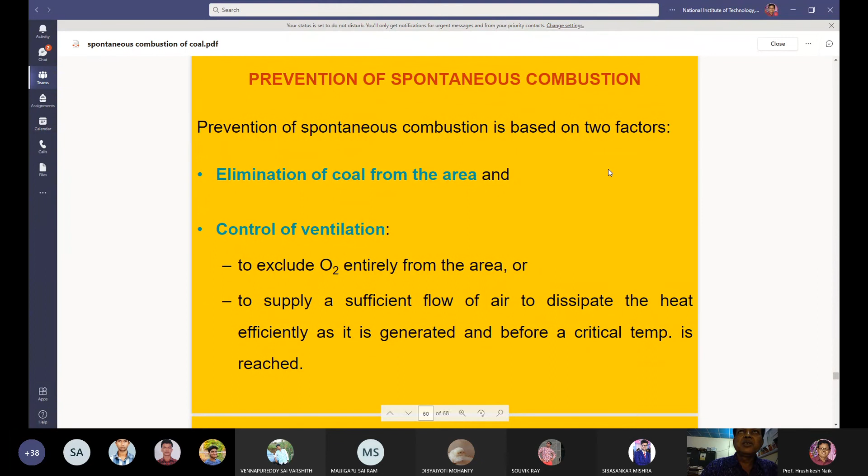So how to prevent spontaneous combustion of coal? Prevention of spontaneous combustion is based on two factors: elimination of coal from the area, and control of ventilation. There are two methods by which you can prevent spontaneous combustion of coal: to exclude oxygen entirely from the area, or to supply a sufficient flow of air to dissipate the heat.

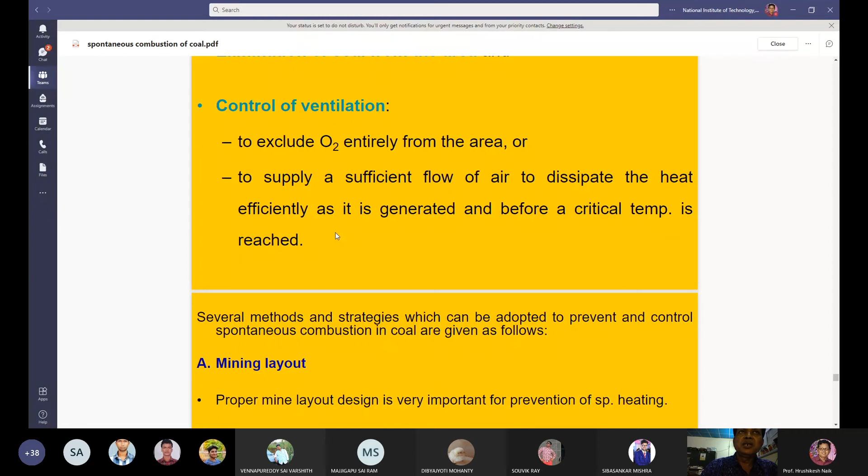Heat is dissipated efficiently as it is generated, before a critical temperature is reached. Several methods and strategies can be adopted to prevent and control spontaneous combustion of coal, which are given below.

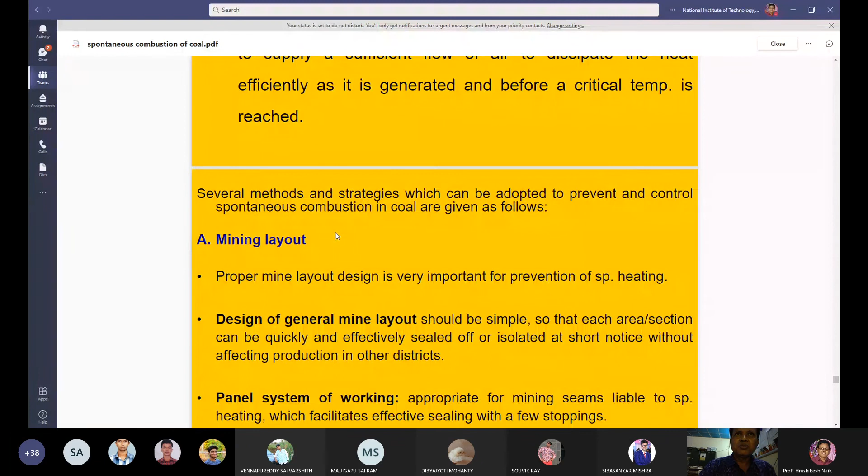Mining layout: proper mine layout design is very important for prevention of spontaneous heating of coal. Design of the general mine layout should be simple so that each area or section can be quickly and effectively sealed off or isolated at short notice without affecting production in other districts.

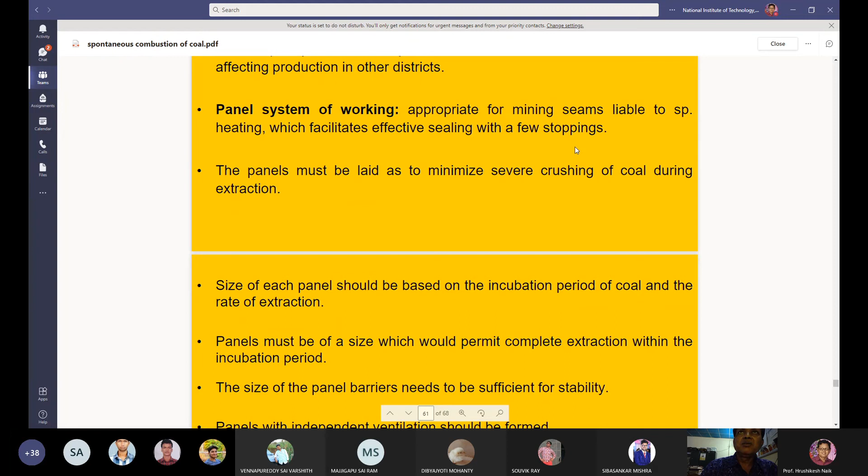A panel system of working is appropriate for mining seams liable to spontaneous heating of coal, which facilitates effective sealing with a few stoppings. The panels must be laid out to minimize severe crushing of coal during extraction. The size of each panel should be based on the incubation period of coal and the rate of extraction. Panels must be of a size which would permit complete extraction within the incubation period of the coal.

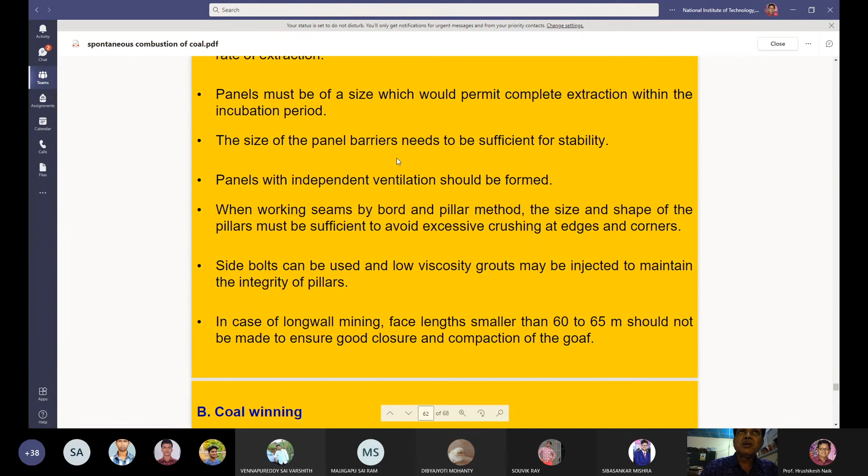The size of the panel barriers needs to be sufficient for stability purposes. Panels with independent ventilation should be formed. When working seams by the bord and pillar method, the size and shape of the pillars must be sufficient to avoid excessive crushing at edges and corners.

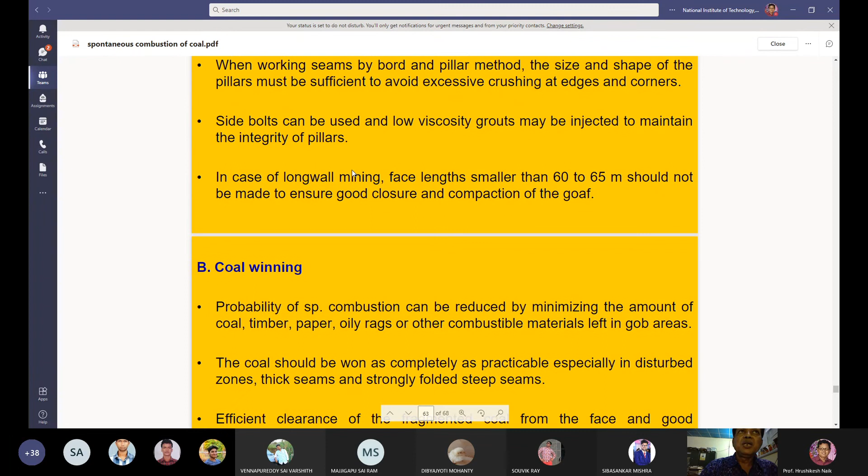Side bolts can be used and low viscosity grouts may be injected to maintain the integrity of the pillars. In case of longwall mining, face lengths smaller than 60 to 65 meters should not be made, to ensure good closure and compaction of the goaf.

So then these things, coal winning and other aspects, we'll discuss in the next class.

So today we have discussed the various factors responsible for spontaneous heating of coal, and we have also discussed the various stages of spontaneous heating of coal and how to detect spontaneous heating of coal. There are three methods of detection: one is by human sense, second is by thermal survey, and third is by gas survey. So these are the three methods available for detection of spontaneous heating of coal.

We have also discussed different gas ratios, including Graham's ratio and other ratios.